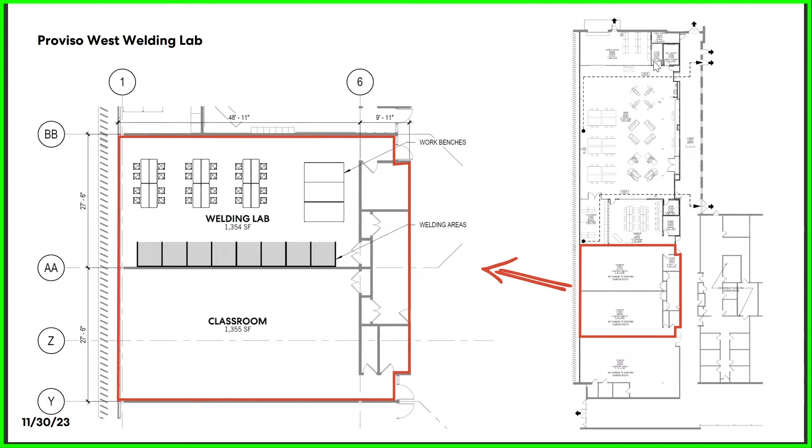To touch base again, on the left here, program highlights - I already mentioned the design will accommodate up to 16 welding booths. We'll have gas tank storage as well as a fume and dust extraction system. We'll have capacity for electric welding systems, so any of your arc welding systems like MIG and TIG. There'll be grinding stations, work tables, a place for hand tools, as well as attached classroom, office, and student staging spaces. And I already mentioned the alternate for the corridor.

What we're looking at for a preliminary schedule, Tom already touched base on this. We're aiming for end of December to release bid documents for an equipment pre-purchase to Gilbane. This would include items like electrical transformers and any potential mechanical equipment that we're seeing longer lead times on. It would be expected that these bids would be received in January and be voted on by the board sometime in late January to accept these bids, in order to aim for an end of summer, fall completion for this work.

Alara and the design team are monitoring equipment lead times, and if anything varies from that, we'll certainly keep the district updated. Our friends at Gilbane are also looking at lead times and informing the district and the design team.

We are planning on providing the board a number of times to review the design. We plan on providing schematic design documents for district review in December, outlining where walls and ceilings are going. We expect to present a design as well as a project cost estimate at a January Board of Education meeting, so the board can see the budget as estimated by Gilbane, along with some graphical renderings of the space.

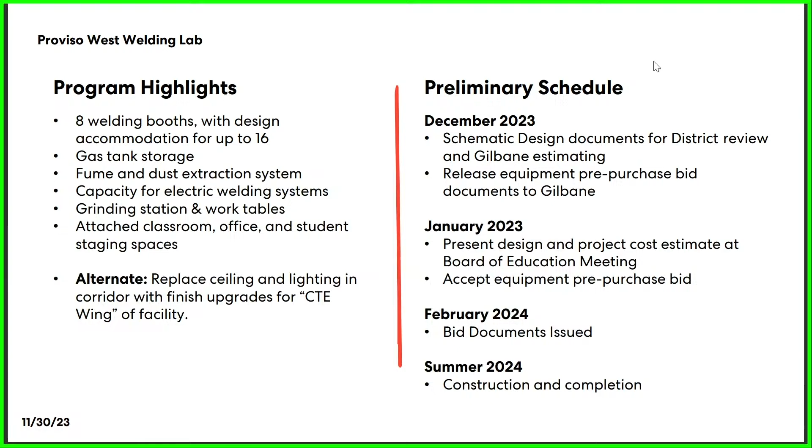On the exhaust system, according to this rendering and the previous photo, I see you're completing one side now. Is this exhaust system a trunk line system, or is it individual up into the roof?

It'll be planned for 16 booths. Typically, a snorkel comes down to each individual booth, and then it collects into a central main duct, and then it goes out to something like you'd see in a wood shop where there's a conical dust collection system. That would be a large piece of equipment placed on site. We're targeting the east side of the CTE wing to find a place to pour a pad and put the dust extraction system.

No, I get it. Just what you mentioned, that it's going to be made for the 16th, it's going to be ready. You're going to have to punch through the roof there and reseal. All the welding booths are just concrete block walls, so you'll probably see the actual booths, but they won't have equipment and some of the other features yet, they'll just be ready for it. The extraction system, since you have to open up the roof, will be for all 16.

Correct. Now the electrical infrastructure, like I heard you say, you're going to need transformers because you have to get the electrical system with the capacity for the welding system. Do we have that nearby in that section, or is the electrical main switchgear somewhere else? So the main switchgear is underneath the cafeteria.

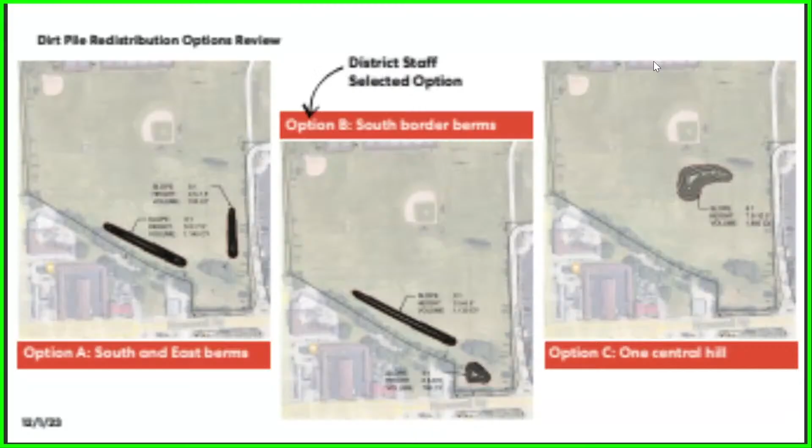Just wanted to touch base real quick on the Proviso soil redistribution. This is another item that, along with the equipment pre-purchase, will be provided to Gilbane for bid later in December. Our civil engineer provided 3 options that meet the 2 goals we have for this dirt redistribution. One, it has to be extensive enough to accommodate all the soil to be redistributed. But two, it can't be so extensive that it triggers MWRD stormwater management requirements. So they developed 3 options that meet those somewhat conflicting project goals. We reviewed these with district staff, and it was determined that option B would be the most desirable, and that's what we are proceeding with.

This consists of a long linear berm that goes along the southern border of the site, as well as a larger mound, more or less in the same area the current pile is at, but shorter and graded, the grade stabilized, and then planted with native vegetation to minimize maintenance needed. Mr. Belter, the main reason we selected option B is because we believe it will be the least costly to the district. A large amount of those soils will be left in place where they remain now, not moved to an adjacent space, causing additional trucking and manpower. So we believe option B is the least expensive approach. That's why that approach was chosen.

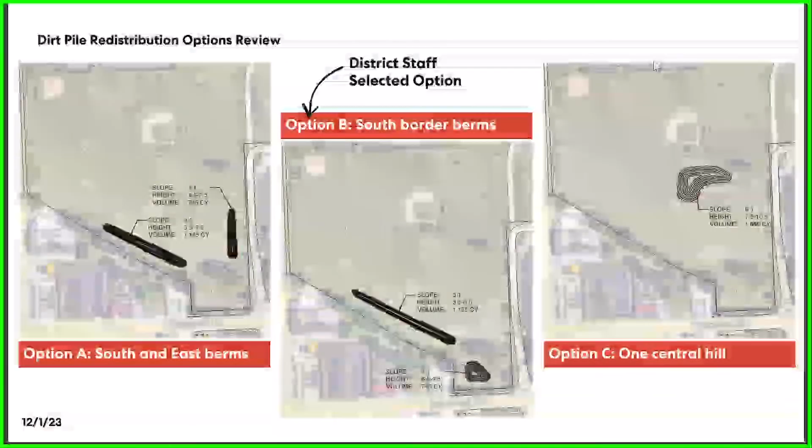But two things we need to get in front of, Carl: we need to talk to the cross-country coach, because that portion of land is a 2-mile course for cross-country. We need to get in front of Mr. Brazier and Mr. Davis, just to bring them up to speed on what we're doing. If we need to move the pile over 3 feet left or right, we can accommodate and make sure we're not negatively impacting cross-country. Then to the west section of that pile is a football playing field, so we need to get the football coach involved as well, and Mr. Davis, to let them know what's going on. It doesn't appear to be in that space, but it looks pretty close. So we can set up a meeting with those individuals over at Proviso West just to go over what this is going to look like and what impact it might bring to their programs, so they know what's going on for next season.

Are we going to need drain tile for this? No, this is just regrading the site. I'm saying, could it cause a future issue with flooding? I don't know what the elevations are for the total field, but if it all came down going south, it would hit the berm. That was the motivation behind some of these designs, we need to maintain the current drainage on the site as it is. We can't impact neighboring properties. So that's what led to this design. We can't just spread it across the entire site, because then we disturb too much of it. This was a solution our civil engineer developed.

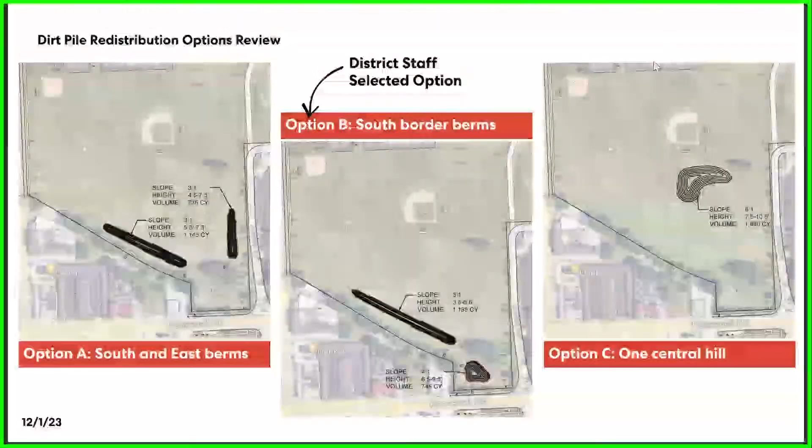Let me ask you this question instead. If we were to have a flooding issue there with the grass in front of that section, northeast, how difficult would it be to install a drain tile system to reroute that water and not have that issue? Any site work would have to be done according to the MWRD stormwater management ordinance.

Because I see it's a good idea to keep the water going to these businesses there. Do they have a current issue with getting too much water from our fields? I don't know that that's a problem that has been studied. Again, right now our civil engineer is tasked with maintaining however the water is flowing now, it will flow the same way when this project is completed.

So that's why you can see the berm has been located off the property line substantially, so that it doesn't affect how stormwater flows off the site, perhaps onto a neighboring property, if that's what's happening now. And what was the reason for that? Was that the most cost effective? So it was the most cost effective option, yeah.

And is it a quarter acre, or a third of an acre of land that we can own, or? Half acre? Half acre, I believe, is what the MWRD stormwater management requires.

We explored moving this pile over behind the football field, behind the stadium where the visitors sit, just to hide it more, because a large portion of this pile will remain in an area where a lot of complaints are coming from as we speak. But I think it'll bring some value to most community members once it's graded and green vegetation is planted, and they see it's not contaminated and won't hurt them because something is growing there. But this is the least impact cost-wise, because you don't have to move all of the pile.

If on the left, if we take all of that dirt and move half of it over to the left, which is back towards the west, that's all the dirt is there now. All of it is right there now, so a large portion of that dirt will remain there, and we won't have to pay to move it. To the left, which is west, and to the right, which is northeast, we'd have to pay to move that dirt, and move everything.

So the middle portion is the option we believe is the least costly and causes the least disturbance to the existing land, because obviously you're not moving all the dirt.

And what's the closest field to this? There's a sophomore football field right there to the left, which is west, northwest of that pile. It's approximately 40, 50 feet away from that football field. Okay, all right, thank you.

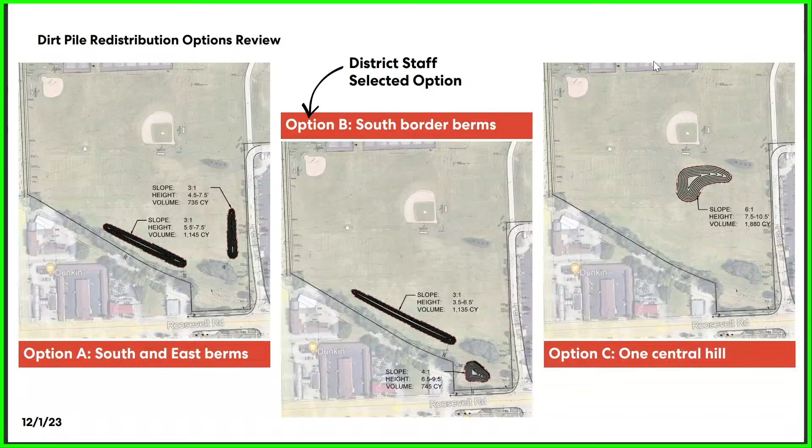Next, we're going to touch on some secure entry projects. These were items the district asked Percival to look at about a year ago, to look at the potential project. Concept designs were prepared and provided to Gilbane for estimating, and then in March of this year, estimates and designs were presented to the district for review. If the district would like to proceed with the secure entry project, this is for all three facilities.

It's just a preliminary schedule we're kind of drawing up. If Percival were given the go-ahead to proceed in January of 2024, we would have some initial scope meetings and concept meetings with each facility's staff to determine and confirm the extent of work. Once that's done, we will provide a proposal for that design work, which would be completed between February and April of 2024.

There would be a schematic design process where we would produce documents for district review as well as Gilbane project estimating. Then we would prepare bid documents between May and July of 2024, targeting an August to October bidding and board approval timeline. This would be a summer 2025 project for construction and completion.

Just to touch base on a couple of the conceptual plans. Again, this didn't really get further than the kind of area conceptual studies. So this is Proviso West. This would be enhancements to door 1, where there would be a secure entry system. In general, the typical concept for school entry is that you have a pair of exterior doors that a guest would need either credentials or be approved by security staff to enter into.

At PMSA, I got a question. This concept for the secure entries, that was in November. Was this brought up? Was that scheduled for this phase?

No, this was a project that came to the surface. There was an issue in Missouri where there was a shooting at a school, and at the time, the previous administration asked us to start design work and get this up and going.

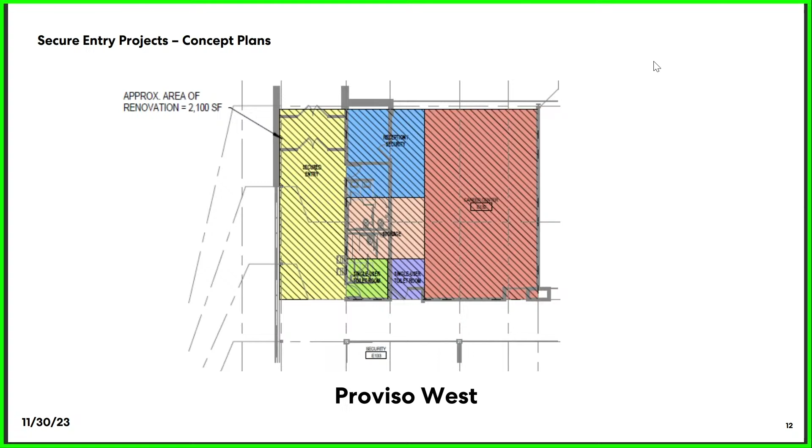Then in April of this year, we kind of put the kibosh to all of it because the administration, the board changed, and the administration didn't want us to move forward with it. And then 2 weeks ago, we had an unfortunate incident at Proviso West at door number 1, which is right here where this double walking vestibule air chamber will go. There were some parents who forced their way into the building, and this would have stopped it. So during our operations meeting over at Proviso West, the principal brought it up that we need to consider bringing this back. So as of now, we're bringing it back to see if we can get funding.

Who said bring it back? Principal Martinez wanted to bring it back because of that unfortunate incident that happened.

That's why I was asking the question, because it seems like this is linked to what's been happening. I'm not saying we shouldn't do it, but it's not gonna solve the problem, it's gonna help the problem. So I just wanted to know why this is up here. And I kind of, you know, everybody thinks board members are stupid. It's only for review. No, I'm just saying everybody thinks board members are stupid, because some of us go to school, some of us don't. And I really don't like it when you just throw stuff in there like, oh, they're stupid, don't approve it. Be transparent. It didn't have to take me asking this question to get the answer. That's all I'm saying, because that's what I saw.

This was brought back because of what happened recently. So, you know, this would be talked to the board, to the community. I'm sure the community wants it, but just be transparent. Just tell me why. Don't just put it in there. As soon as you see it, you know, because we catch these things. I catch these things. So when I see something going like that, that's why I asked you the question, and you just gave me the answer. And that was the answer I was looking for. Yeah, that's transparency. It's, just keep it simple and transparent. Understood. That's what I'm saying. We're not stupid.

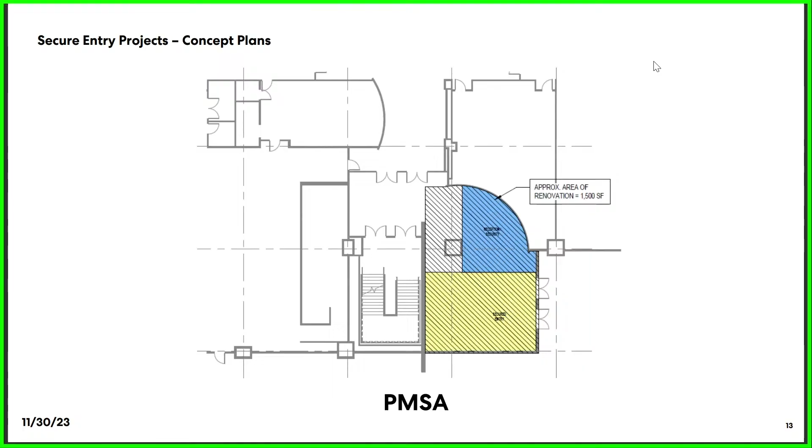And the reason I ask, guys, is because now this impacts our original facilities master plan. Because we talked about it, and I want to ask you what phase it fits into, because I remember it was in none of our phases. So now we're changing things, and now we're affecting our whole facilities master plan. This has to be brought up to the board to make the decision, not just thrown in there because somebody thought about it. That's gonna change our whole plan. If that changes the FMP, that changes the 5-year financial plan. It changes everything, so we really have to know what's going on. We're the ones that make the decisions, and we're the ones that are accountable to the community. We need to know why you're doing this.

I'm busy sometimes, and I trust you to do everything, LT, and you guys out there, the team, and kind of direct us, because that's your job. You're the architect, you're the construction manager, but we need to know why. Are we following the plan? This is not in the plan, and I don't have an issue with it, I really don't. But that's gonna affect other things that we have planned in the facilities master plan, and we need to know that. Don't just throw stuff in there because whatever. Let us know why you're doing it. We had a meeting, we discussed this, I think we're gonna do this.

I don't want to stand on the dance floor and direct everybody, because that's not my job. My job is to make decisions and stay out of the dance floor so I can make a smart decision based on what you present me. But if you don't give me all the details and you're not transparent with me, I cannot make a good decision.

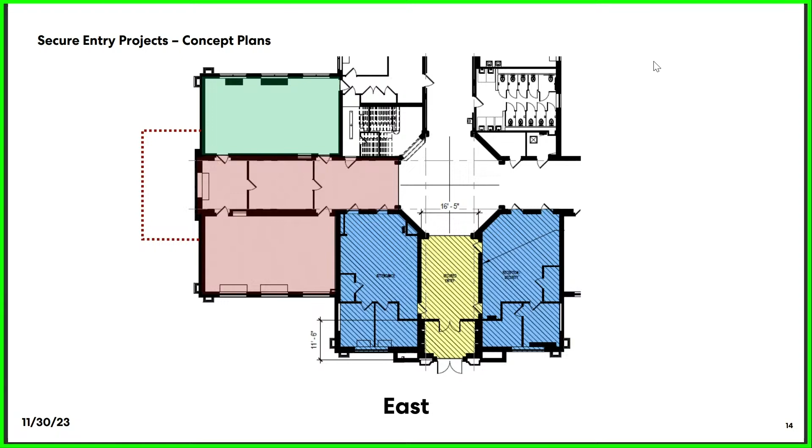So at Proviso East, again, a similar concept to the other 2 facilities. However, at Proviso East, there's a unique opportunity to reorient the door entry to face the parking lot, the student parking lot, where most of the occupants approach the building from. This is an initial concept needing significant study and further discussion with the district, but the concept would be to create some sort of entry canopy at Proviso East and rotate the secure entry area to the north side of the building. That would shorten the distance students have to travel to enter the building, as well as eliminate the need to walk along First Avenue. All these issues and concepts can be studied further if the district would like to proceed with them.

Talking about signs, I believe that sign up here that says following, we should get that fixed. The banner facing Roosevelt Road, the blue ribbon school banner, one of the corners is off. I think when we had an email about that, we fixed it, and then probably the wind knocked it down. So it might be time to bring it down anyway, because that was what, 3 years ago?

I believe the last thing I have to discuss here is just some signage work that Percival has been asked to assist the district with. Predominantly exterior door sign renumbering and a graphic refresh is a required item, so that way, for example, if a first responder approaches the building, they can be told, this is door 28, with clear markings that is the door. Additionally, as there's been some reconfiguration of spaces at facilities, Proviso East and Proviso West will have new evacuation signs created, printed, and posted throughout the facility.

A similar effort was completed last year at PMSA, so this would just be extending that effort to the remainder of the district's facilities. Additionally, Percival will be providing a proposal to the district

to do a room renumbering effort at Proviso East. As everyone who spent time at Proviso East knows, it's somewhat awkwardly numbered, harkening back to when the building was originally built, where there's a ground floor, a first floor, and a second floor. So everyone gets confused that the first floor is in fact the second floor. That would hopefully rectify that and modernize the room renumbering.

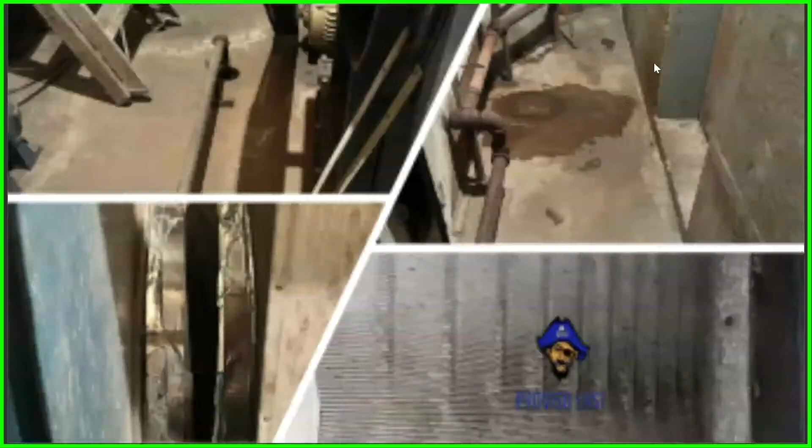This is also in that same space where that vibration dampener is. There's a steam leak in that room. We did our best to repair it. We need to order a new coil. We did add filtration to this air handler, and also did preventative maintenance work on the motors inside that space and removed all the debris.

Added a few light fixtures in that space because it was pretty dark when we were doing that walkthrough with Mr. V and Mr. Hope.

Also at Proviso East, in the corridor area at the main entrance of the field house, the doors were painted, the walls were painted. All of the door hardware were checked for proper operation. This space is ready for season as we speak.

Also, a few bathrooms off the main gym field house main floor. These bathrooms have received new fixtures, new sinks, new control devices on the urinals, paint, contrasting colors. We do need to upgrade the doors on the stalls, but that will come at a later date. But this bathroom has come a long way in the last month.

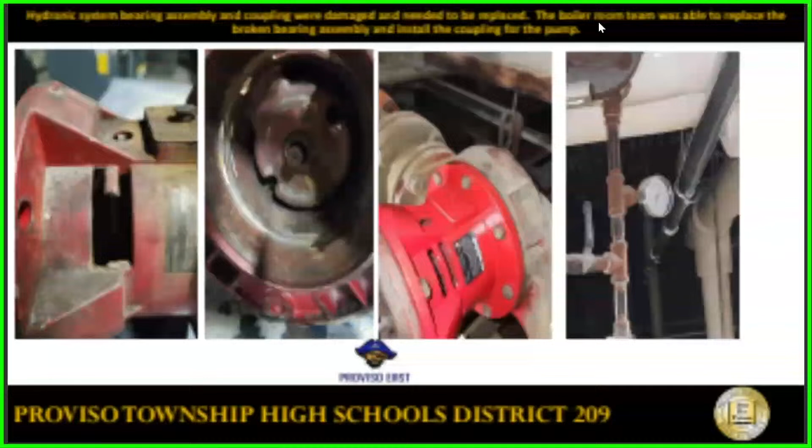Also over at Proviso East, this is one of the main issues with the field house - we have a hydronic system in that space. We're hoping that we can upgrade the air handlers in that space to get it on the VRF system over at Proviso East High School.

Also over at Proviso East last week, Mr. Hull asked the food service team to get together with his coordinators to have breakfast with Santa for 260 students and I believe 60 parents. This was a success, and I want to thank Ms. Garza and her team for doing a fantastic job for jumping on this right away at the last minute, organizing with GFS, and also spending their weekend at Proviso East to cook the food and clean the kitchen.

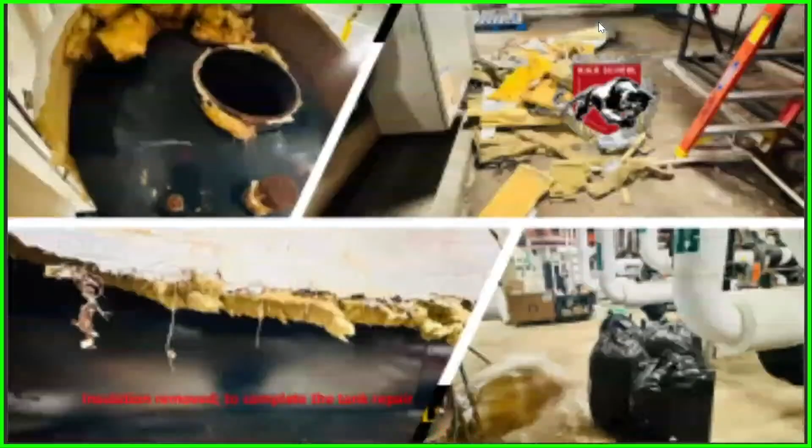The big caveat over at Proviso West High School was the heating system, to get it up and running. The team did a fantastic job helping me seek out contractors. Giovanni did a good job providing names and contact numbers. You'll notice this system has been completely reconfigured to the existing tank that Proviso West needed to get the heating system back up and running. This is a portion of the work where the team jumped in and ripped off all the insulation from the exterior portion of the tank.

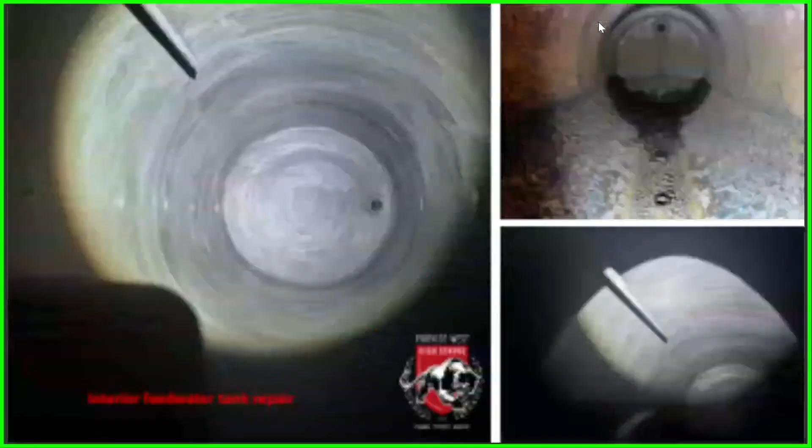All the jackets were bagged up and disposed of correctly. This is a portion of AMS out of Fort Wayne, Indiana. They flew a team here from Los Angeles, California to do a fantastic job inside this tank so that we can store water inside it and heat our building over at Proviso West High School. We have not been billed for this work yet, but I expect to be billed within the next couple of days, because I've been sending them scathing emails that we need to get this on the books.

And paid. Also, we prepped the tank that failed with isolation valves and pumps, so when the new tank comes in, we can just take the old tank out, put the new tank in, retrofit the new 3-inch valves into the tank, and have the system back up and running completely instead of having only one single tank.

Also, Proviso West over at the stadium, we winterized the stadium bathrooms, turned the water off and turned the heat on. We expect the temperature to be around 62 degrees in that space, but these walls do not have insulation, so we have to monitor this closely and make sure we use antifreeze in the toilets and urinals so that we do not crack any of the plumbing.

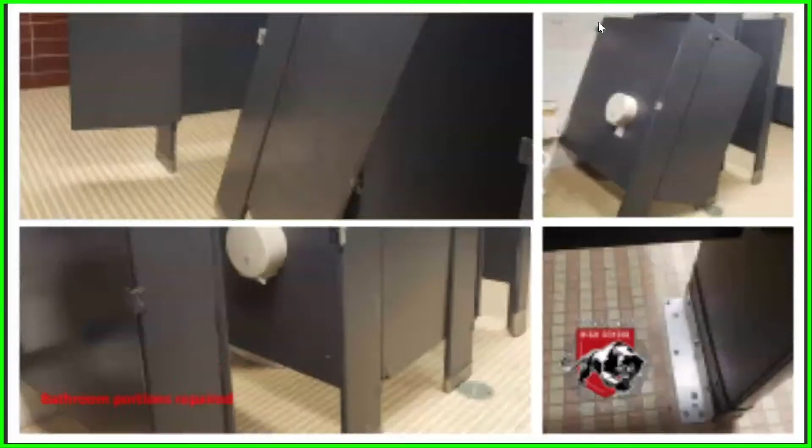Also, over at Proviso West High School, we had an unhappy student that trashed one of the bathrooms. The maintenance team actually went in and fabricated some brackets, got this bathroom back up and running. There is no additional work needed in this bathroom at this time.

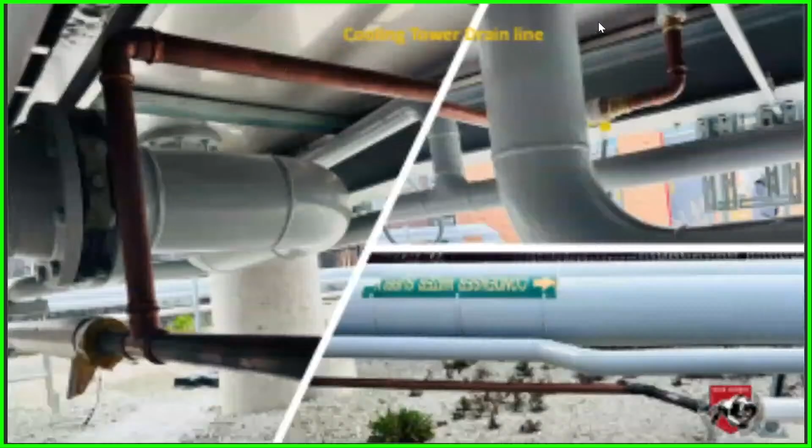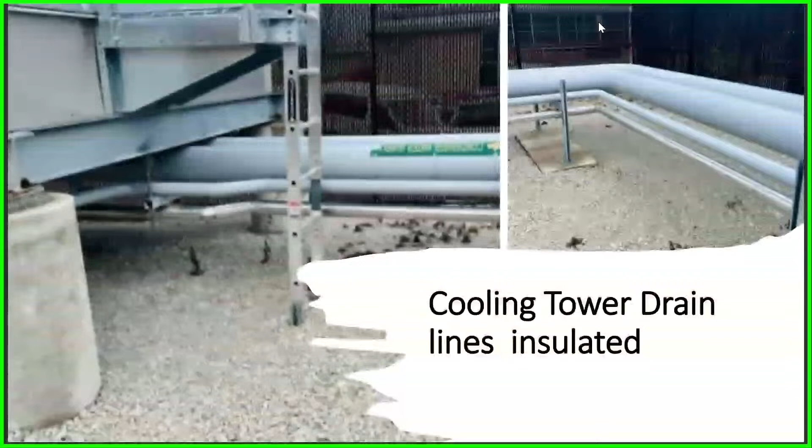Gil Bain has done a great job helping Proviso identify deficiencies related to the punch list. We had a leak here about a year and a half ago, and replaced some piping in this area because the pipe burst over the winter since there was some water left in it. That was a collaboration with Proviso and the trade contractor, a shared cost. Gil Bain actually got the trade contractor back out to insulate the cooling tower drain lines at no additional cost to Proviso. This work is completed and it looks great.

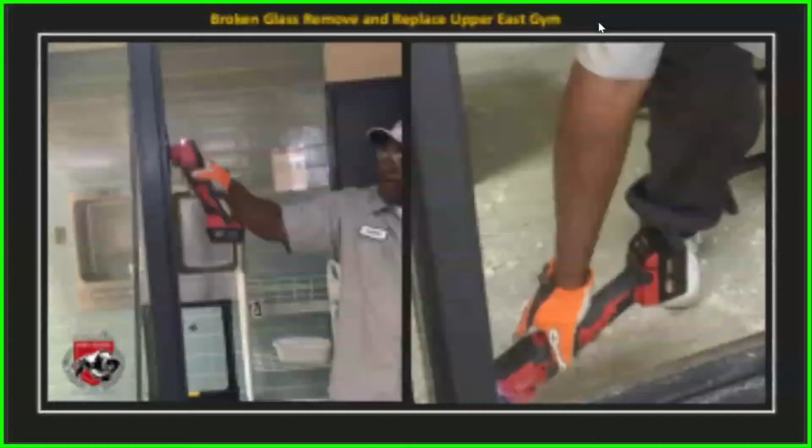Also over at Proviso West, there's a couple of pieces of glass in the Upper East Gym that we have to replace. Leroy is in training. We're hoping he'll be part of our maintenance repair team. He's a custodian now, and we have him in training to get him up to snuff to be part of our maintenance team over at Proviso West.

That's the whole assembly, right? The steel assembly. You need the frame and everything, the doors.

We do need funding to get them on the facility master plan to get them replaced.

Now the secure points, are these some of the secure points? No, so this is door 24. This would not be one of the secure entries because this entry is used for sporting events, for the field house in the late evenings, and security would actually be in that space. The secure entry would be at door number 1. Is that on the south end? That's on the south end. So the secure entry would be over at door number 1, where most of the parents and visitors would be coming in at.

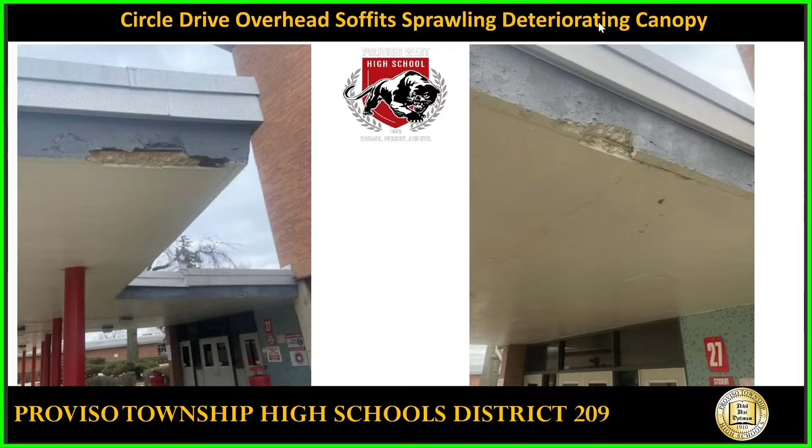Also, want to showcase Circle Drive, the overhead soffits, and this sprawling, deteriorating canopy. This work is heavily needed. We had an outstanding event for Turkey Drive, and a couple of pieces of this concrete actually fell on that day. So we need to get this ready as soon as we can.

Also around Circle Drive, you can see the pitting concrete on the far right, and the peeling paint on the canopy on the far left. We did bid this work out about 3 months ago, but we were not happy with the price. I believe it came in at like $181,000. We do believe we will gain some efficiencies by packaging more work with this instead of just bidding it as a standalone.

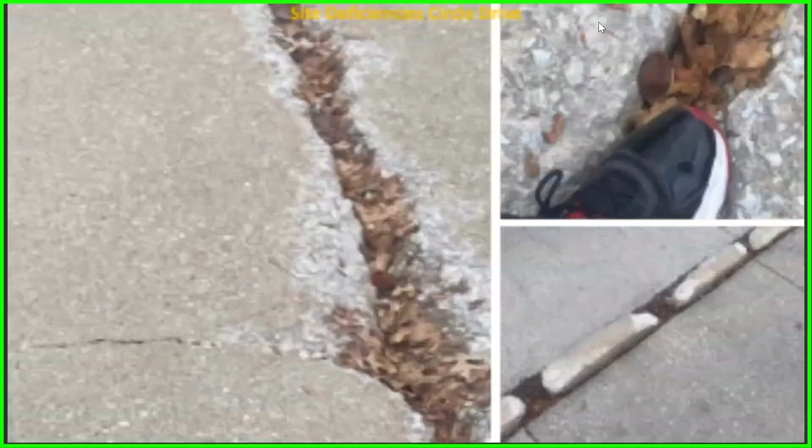This is an additional picture, on the far right. You can see the curb is just coming apart. This is from plowing over the years. If I had to take a guess, this curb is probably over 50, 60 years old. We need to get all this site circulation work completed, because if not, somebody's eventually going to trip on it.

In the picture on top, you'll notice my foot is in that crack. That crack is about 4 to 6 inches deep. And then I took an elongated picture of the crack. This is near entrance number 24, where students enter. We need to complete this work as soon as we can. We do plan to patch this with some concrete patch as soon as the weather breaks. As we speak, we do have cones out there to identify that it is a hazard.

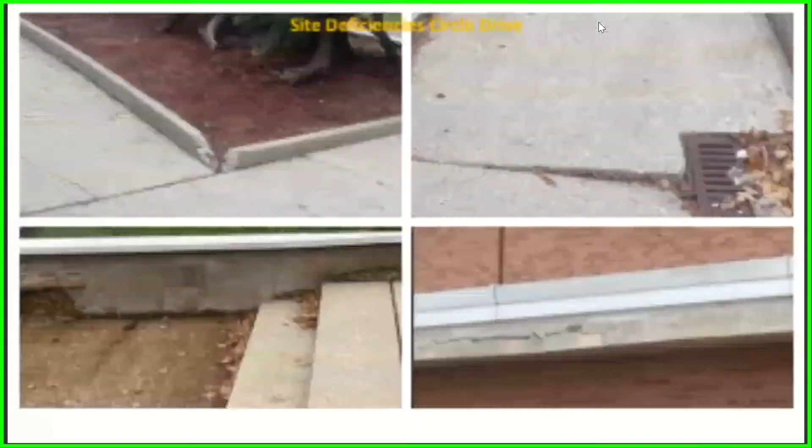Some additional pictures, you can see right there on the corner where the curb meets, it's just busted off on the bottom left. Pulverizing cement on the bottom, all the rebar is completely rusted. On the right upper hand corner, you can see where the drain is collapsed. All of that needs to be replaced, and another picture of the canopy just coming apart.

Would proper maintenance, coating it, help eliminate the water getting in and freezing and expanding as well? Typically, every 3 to 5 years, we would coat them and have them restriped. This lot is probably 25 to 28 years old. I do believe this pavement has reached its useful life. We cold patch it as much as we can, but cold patch is a temporary fix, and freeze and thaw is just going to heave it out. We need some continuous paving that's going to be pushed down together and bind together. This lot is definitely past its useful life.

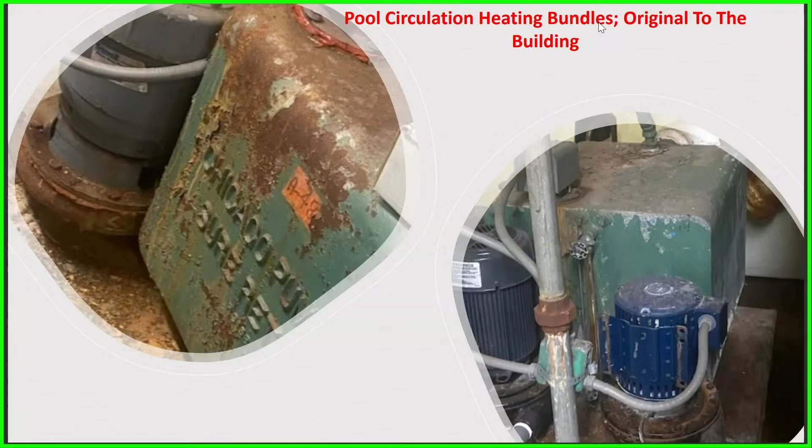Also over at Proviso West High School, some circulation pumps, we have the heating bundles for the pool. We need to get an independent heating source for the pool so we can use it in the summertime. Right now the pool is dependent on the boilers, and the boilers are down for preventative maintenance in the summer. We need to make sure we get this added to the facilities master plan.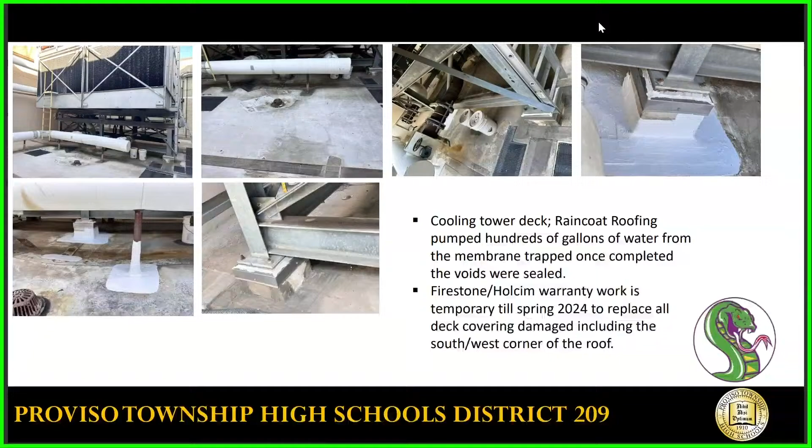Raincoat Roofing is working with the roofing company Firestone to make sure this work is done by the spring of 2024. They were here for about 4 days completing this work. The roof is manageable as we speak, and there are no immediate concerns.

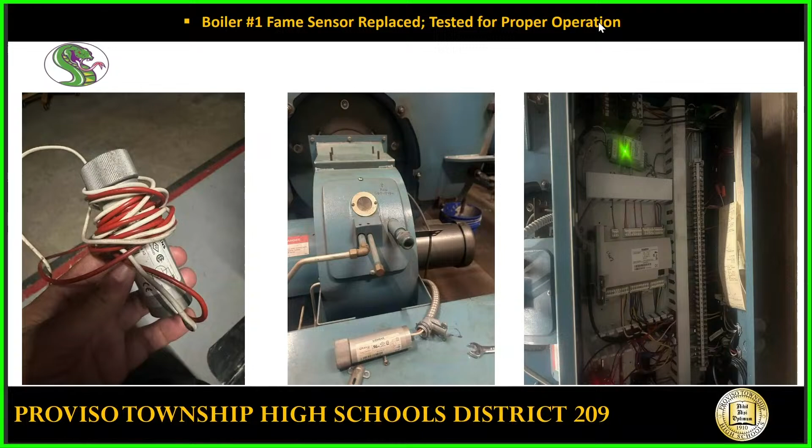Over at Proviso Math and Science Academy, one of the flame sensors was found defective. On the far left is the new device that was installed. Mr. Johnson and Mr. House did a fantastic job getting this unit back up and operational. On the far right, you can see we got a green light. Everything is working as we speak, and the combustion is working fine.

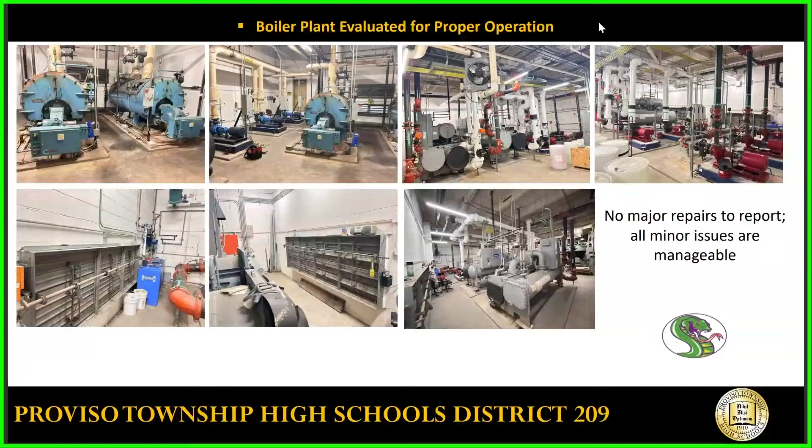Also, we did preventative maintenance, a complete evaluation. Proviso Math and Science Academy is an encapsulated building with no windows that can be opened. We wanted to make sure all of the air dampers were operational and that we can provide reheats and cools back into the building to properly condition it during these cold winter months. Also, with the Math and Science Academy, we had a flood last December.

This is work that we did fund, replacing carpets, replacing stair treads. We've been working with Edwin Anderson and also Celtic Environmental to get this work done. This work is about 95% done, and it looks pretty good, and that carpet needed to be replaced because it was from 2005.

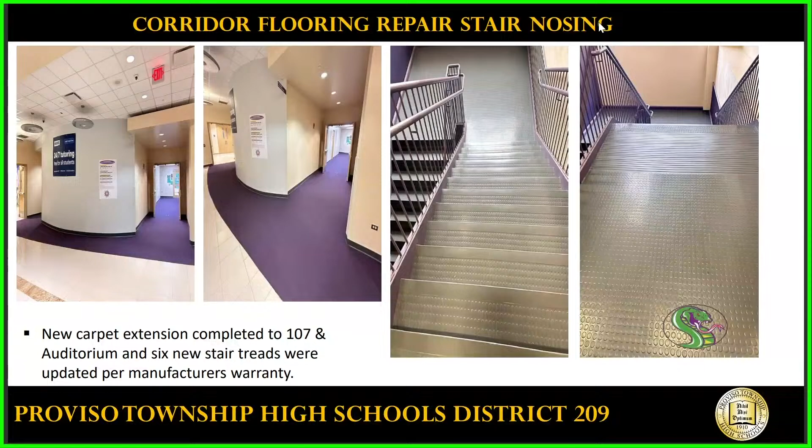Last year in December, we had about 3 days that was about -12 or so, and that air coming out of the north froze the pipe and it burst overnight. The next morning we came in and it was 5,000 gallons of water. It was black steel pipe. We got JCI to come in to re-thread it and put the sensor back in, get the sprinkler system back online. But we're just finishing up all of the additional work because some of it was insurance work and some of it was in-house work.

Facility usage: Speaker Chris Welch will be hosting Christmas in Proviso, December 16th, 2023, 7 a.m. to 2 p.m. This collaboration with Proviso selects families from all of the communities. Those families will be at Proviso West High School and will be presented with hundreds of thousands of dollars worth of Christmas toys. All villages are participating, most park districts are participating, most businesses are participating, so this is a huge event. If you can make this event, you will not be disappointed.

It is so gratifying to see families who cannot afford the basic essentials receive those essentials, and just to see the look on their face. Also, there's a few churches that are going to be giving out brand new furniture from Costco in the magnitude of about $400,000 worth of furniture. They're going to pull semis up on the south portion of Proviso West and give furniture away. If families can take it home, they're welcome to it. So please spread the word, and if you have time, please stop out and see us.